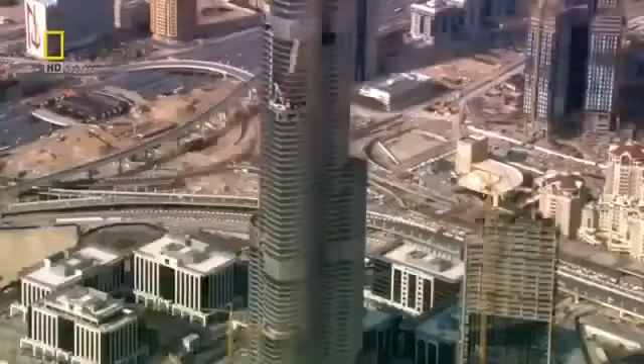We have the tallest building. We've got the greatest hotels. We are creating something very, very special. A centerpiece of this new Dubai will be a shopping mall designed to outstrip all malls, with 1,200 shops and a slogan as brash as its scale: everything you desire.

Completed to a next to impossible deadline. The biggest challenge that we had to face is time. People haven't done anything as this size this quickly before. Riding on its success, a multi-million-dollar price tag, and the reputation of Dubai.

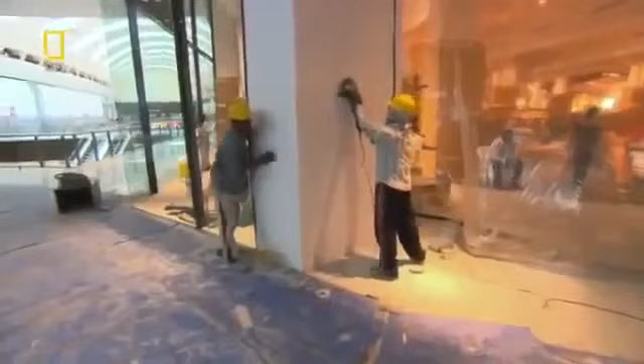The desert sun rises over the Dubai Mall, the city's shining new landmark. In 3 days, the mall will open. Everywhere you look, over 10,000 workers are frantically racing to beat the clock. Miles of railings left to polish, acres of marble still to clean. Mannequins are waiting for their flashy threads.

The mall, sold as the best Dubai has to offer, is now in a desperate race against the sheer scale of this project's ambition.

Bob Fields, the new head contractor, is on his rounds. He has a lot of ground to cover. The site contains the area of 50 football fields. Every corner he turns, there's something that needs finishing, cleaning, tidying, and he has to sort it out himself.

Lynette, where's Omar? Hurry up, I need him right now. Well, tell them to retract.

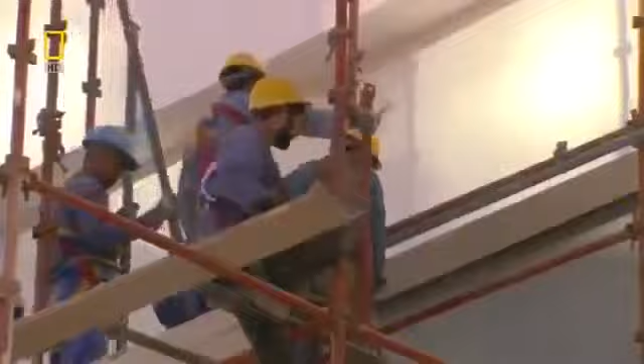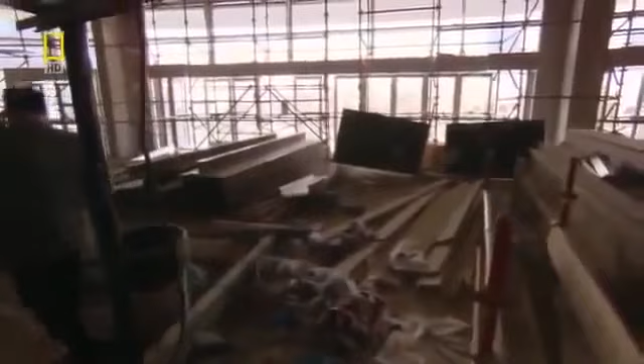He's determined that the mall will open on time. It's already missed 2 deadlines. If it misses a third, well, that's down to him. But of the 1,200 shops due to open here, only half are occupied. Some just haven't been fitted out yet, and some have yet to be leased.

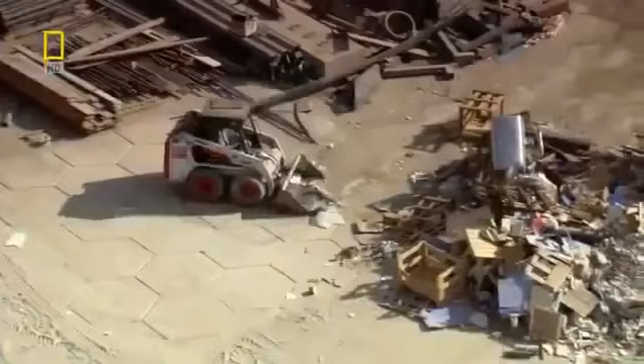What looks to us pretty much like a building site, to Bob is a diamond in the rough. Nobody goes home until 1 o'clock in the morning and everybody's back at 5. Overall, the entire community has come together to cooperate and give us the opportunity to open the mall. It's going to be very exciting.

We're going to have SWAT teams that are set up and positioned around the building. We're going to invite the public to come in. Traffic is going to be a challenge. We're anticipating some 50,000 cars every day.

The thousands who thronged the mall when it eventually opened will never know the real story of those frantic final hours. They would have come to see a mall worthy of Dubai, with opulent spaces and shops, row upon row of them.

There's a vast aquarium to wonder at, with a massive acrylic viewing panel bigger than any other in the world. There's a full-size ice rink in a city where outside temperatures can top 40 degrees.

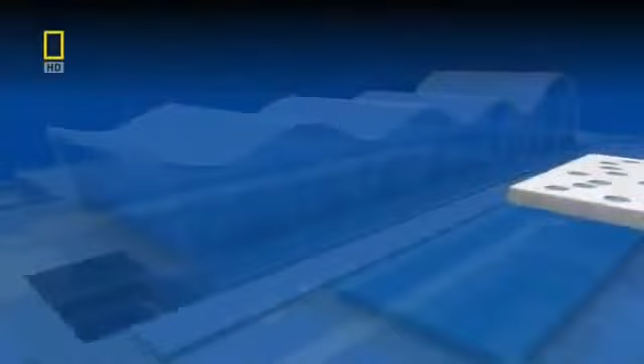The mall is so vast, it was assembled out of 37 conjoined buildings. It boasts an old-fashioned Arabian souk, a world record-beating aquarium, an ice rink, and an entertainment center complete with a roller coaster. Stretching over 1 square kilometer, it sits on a mega floor space that beats the reigning mega mall in China and dwarfs the Mall of America hands down.

Two years back, and a formerly empty stretch of sand is being turned into this retail palace. The project is badly behind schedule. Going by best laid plans, it should have opened by now.

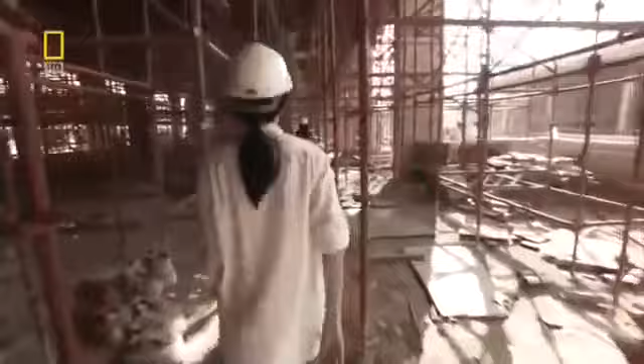Angeline Chan, chief architect, is on one of her regular visits to the huge spaces that she's helping to create. Future ceiling heights for the tenants. Let's go see the precast panels. It's bigger than anything she's yet done, probably the job of her career, with some touches she's particularly proud of.

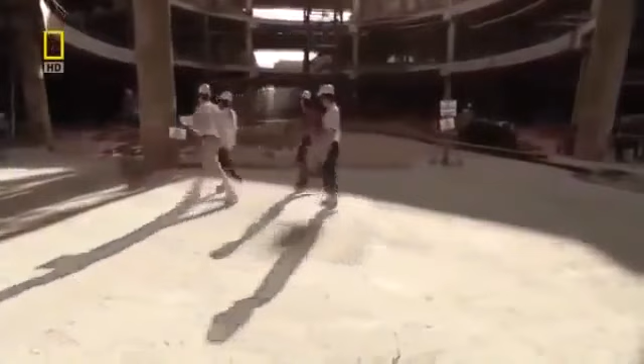I think my personal favorite spaces in the whole mall are all the atrium spaces, the 3-story high corridors. Even at this stage, when you walk around the mall, and finishes aren't even in yet, but you can feel the majestic spaces that surround you. I'm just left in complete awe.

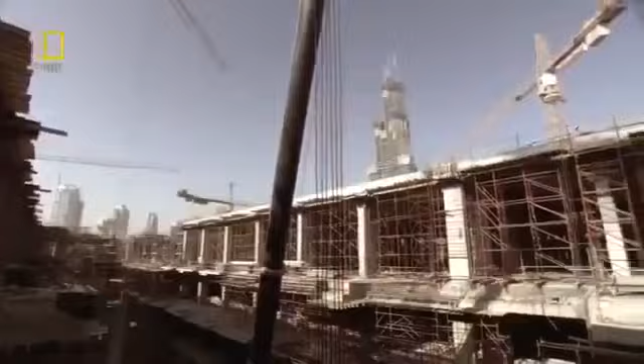There's no time for her to relax and enjoy the view, though. Every time she comes here, there are technical challenges to be faced. The knottiest problem: to get column-free roofs over the vast atrium in place on time.

So what's the contractor promising us now? You're probably looking at about February next year for this. The biggest challenge that we had to face is time. We're given the task of building this mall in 28 months.

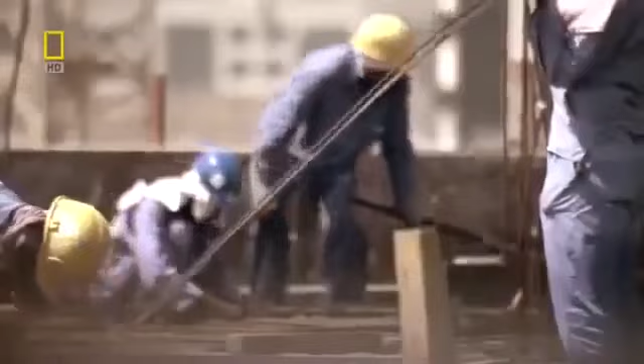Months behind the original schedule. It's not just the open halls that are causing problems. The whole design is throwing up challenges for the architect.

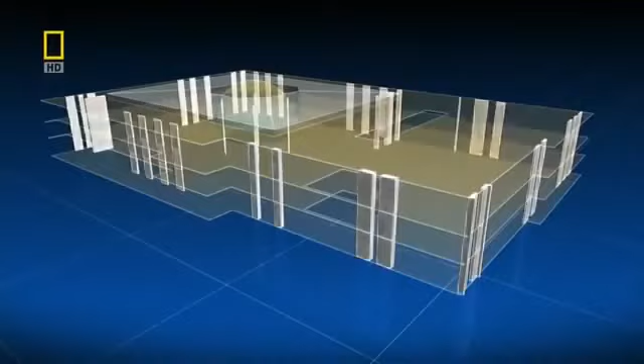The complex has been designed as 37 separate buildings. Local codes say all structures must hold up against earthquakes up to 5.5 on the Richter scale. So each building is reinforced by shear walls that withstand lateral force. A side-to-side motion won't bring it down. A 100-millimeter gap between each building not only allows for expansion in the desert heat, but if one should fall in an earthquake, it won't bring down any others with it.

While Dubai does not stand in a high-risk area for earthquakes, the disaster in Bam in nearby Iran was felt even here. In 2003, that devastating quake left 43,000 dead, 30,000 injured. Many perished as buildings collapsed. In Dubai, no one is taking any chances.

More than anyone outside the royal family, one man is responsible for the shape of modern Dubai. The Director General of the Department of Economic Development, Mohammed bin Ali Alabbar, known universally as the Chairman. Everyone on the Dubai Mall project answers to him.

So you can give me a discount. Our rates compared to them is very reasonable. We will work together, I appreciate it. I will do all your rates, I need to open your book. Open book, I'll do open book with you.

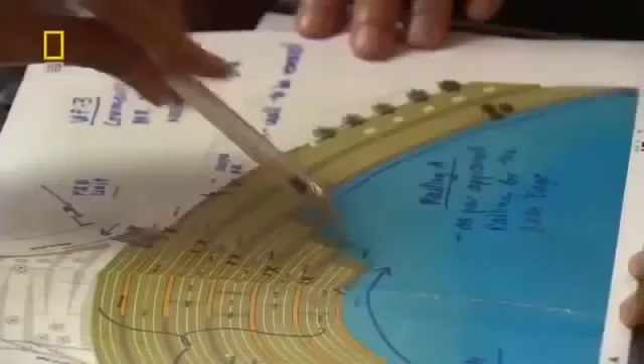Fair? Fair. Open. But the chairman is nothing if not a hands-on boss. It means he comes up with changes to the design.

Today, he's not too pleased with the fountains he's paying top dollar for. Last week we had to decide that we are taking some walls out, some water feature that, in my view and my management's view, was obstructing fountain views. We're putting beautiful restaurants overlooking this $100 million fountain. Can you please take the wall down and let them see the fountain?

Simple. The first reaction is, yeah, it's very, very painful. And there's always a deadline to chase. So it's never an easy task. I like to get involved sometimes in some of the design elements, which maybe I'm a little too involved, to be honest with you.

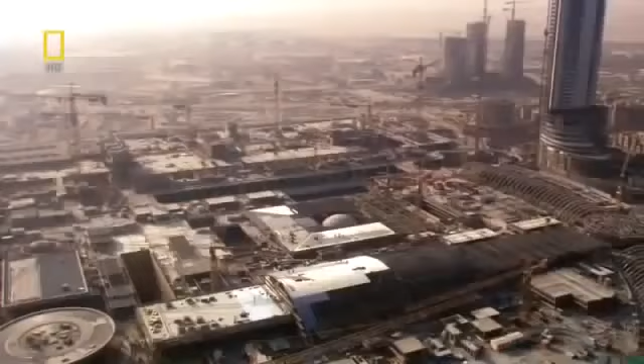Well, his involvement here is one that will reshape Dubai. Next to the mega mall, he's also set his architects challenges that include the world's tallest skyscraper. We are creating something very, very special in this area. We have the tallest building, we've got the greatest hotels. It's going to be something that people recognize us for.

So what the chairman wants, the chairman gets. Back at the site, Angeline has to break the news to the construction head, Jim Scobie.

We've been looking at this for about 6 weeks, 2 months. So it's been 6 weeks? What we'd like to do is, if we can go ahead and redesign this quickly and get it to them. Okay. So the next time we meet Sistra...

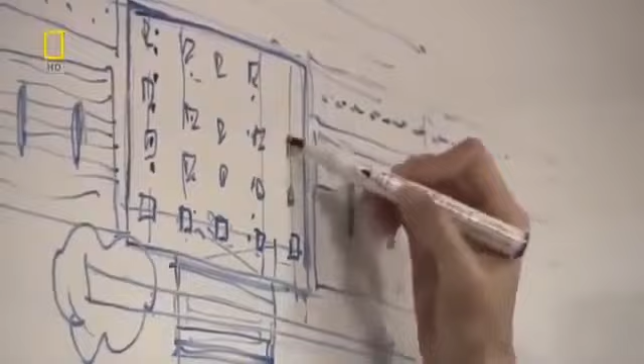For a minute there, it sounded like a plan. Oh, really? But there's a catch. Whatever we design, and we're probably coming up with 3 alternatives, has to be presented to the chairman and all that.

Angeline tries to make light of it. No, just do it in between the piers or something. She always finds a way to make the changes the chairman asks for. So it might be some sort of lightweight canopy structure. And you just hang around here, you sip coffee, you listen to the water, this nice sound, and then birds chirping. Today is a good day.

Everyone politely goes along on pretty much an impossible task. People haven't done anything this size this quickly before. And if this wasn't enough, there's a sandstorm approaching.

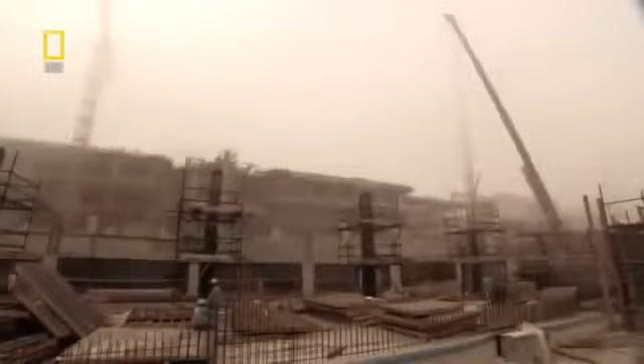The Dubai Mall, largest in the world. It holds 95 elevators, 150 escalators, with plans to attract 30 million visitors in the first year alone to its array of glitzy shops.

At its center is the aquarium with 400 sharks. In total, more than 33,000 marine creatures can be viewed through a panel so large it's in the Guinness Book of World Records. The chairman made sure of that.

The size, it's important, but it doesn't really shake me. But yes, I want to know how big it is, what's in there, how many species. So you see, we've got 33,000 species in this thing, we've got 400 sharks. Say, okay, now we're talking.

The task of constructing this monster mall has been an epic. It's still nowhere close to opening day.

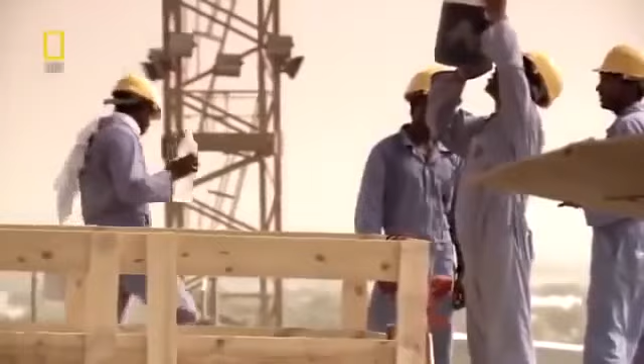Every day, the night shift of 2,500 workers heads for some well-deserved rest, and the day shift of 10,000 workers picks up its tools. It's tough work in the raging heat of the unforgiving sun. Temperatures in the desert emirate can hit over 40 degrees in summer. Heat exhaustion is an ever-present danger, especially for a foreign workforce acclimatizing to the local weather and the demanding schedule.

Currently, the work on site doesn't stop at all. It's 24/7, 24 hours a day, 7 days a week, during summer, during winter.

People say, the difficult we do quickly, the impossible takes us a little longer. And that's what we have to deal with here, until you say the chairman's coming, and then they say, oh, we'll get her done.

The chairman, Mohammed bin Ali Alabbar, is responsible for some of the shiniest new buildings in Dubai. And today, he's coming to the mall for a viewing. He likes to be hands-on.

Will them please, again, I need someone to trim these palm trees around the square. Still, dead leaves are hanging. Yeah? Okay.

On another trip, he noticed the colored panels on the facade of the gold souk were not to his liking. I think it was maybe a little too dark, so I said these shades are not matching from the main road. I said it will reflect badly on us. I think they had to take the panel down and probably replace it.

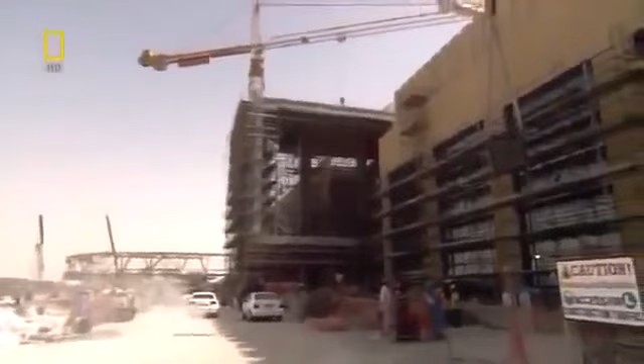Once it's completed, the mall will open onto a boulevard on the scale of Paris's Champs-Elysees.

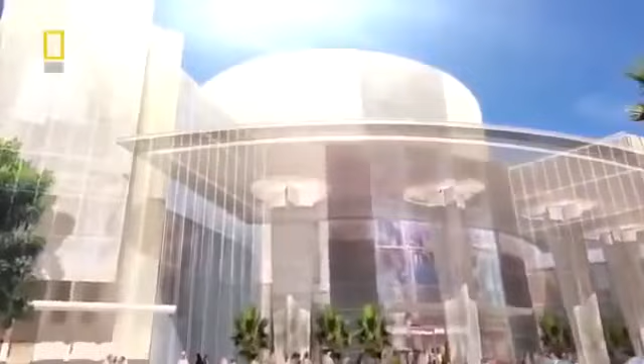Now the chairman wants to see how the grand entrance to the mall is progressing. He wants to be sure it'll make the right impression. Obviously, his arrival is treated as a bit of an event, and he's ushered to the high atrium just inside the main entrance. It's going to be a highlight.

I believe that's about the maintenance issues and all the rest, but when we check their ceramic, they're going to be very, very nice. He listens knowledgeably to the explanations of the decisions being made. The boss tries his best to be enthusiastic.

Then he zeroes in on the details. All your columns are finished one color, huh? One cladding. Okay. Thankfully, he doesn't notice anything he absolutely has to change. I think a little bigger would have been also okay.

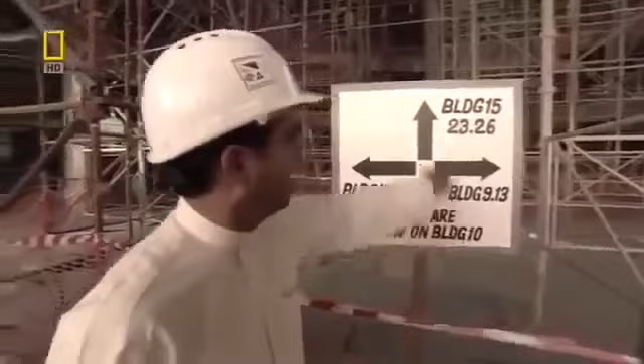Building 11, 12, we are at building 10, building 15, 23, 26, and this is just amazing, as one building.

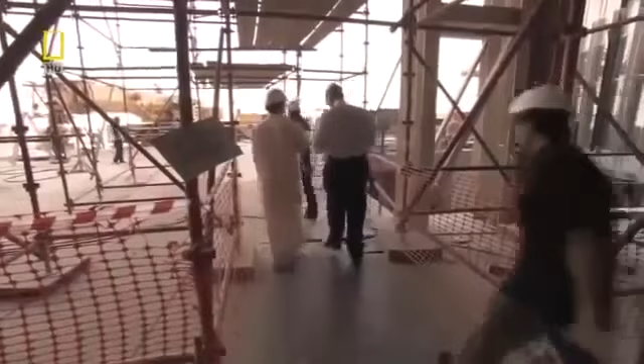Well, I just want to go and shake every small guy's hand. We'll put it together brick by brick. We'll put in the granite floors. I feel like I want to do the opening so quick, and the opening should be for them. Thank you, guys.

In another part of the mall, the little guys are frantically rushing for opening day.

One of the most important attractions at the mall will be the aquarium. Once done, it's designed to impress. That means it's going to have to be big. It will hold 10 million liters of water, equivalent to 4 Olympic-sized pools, and acrylic panels 750 millimeters thick will hold back the enormous pressure of the water. By heating and cooling the panels, the joints will disappear, creating a single panel so big, it'll make the Guinness Book of World Records.

The centerpiece of the aquarium will be a transparent tunnel 48 meters long. Sitting at the tank floor, 10 meters down, it will be subject to immense pressures. Iron rings help to keep its shape. It has used up the entire supply of acrylic from 2 factories for a year. It's had to be precision manufactured in 4 massive pieces, and each giant piece weighs 32 tons and is extremely fragile. So moving them requires care.

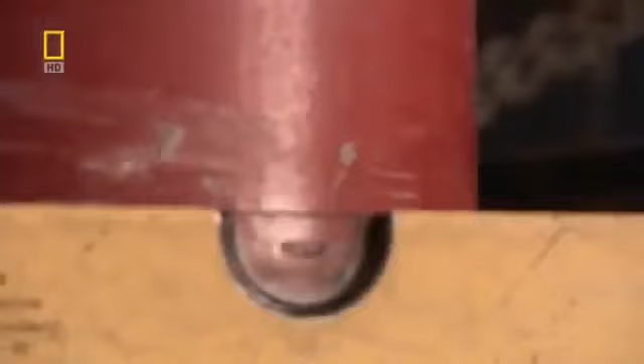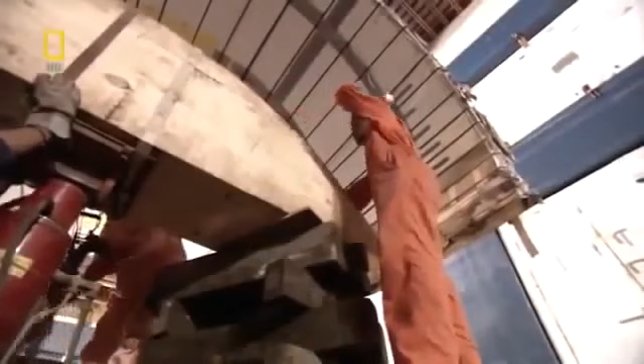It's all done under the watchful eye of manager Peter Knapp. It's the first time anyone here has attempted anything like this. Everything is done in slow motion. Even with something as large as this, there's little margin for error. The skilled workers build up the supports to level the jack before it inches up to take the weight of the tunnel.

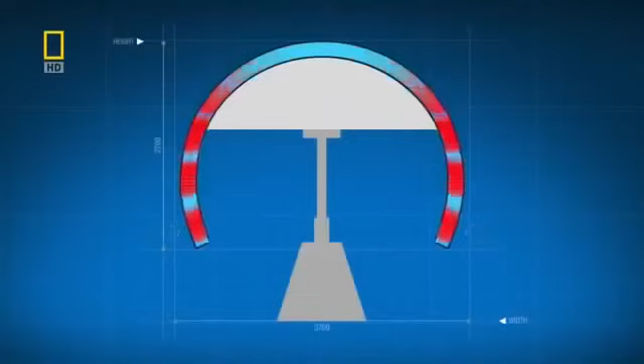The tunnel lifts into the air all right, but soon the crew spots something: the tunnel is distorting under its own weight. The pressure has forced the sides to curve inward. If they set it down now, it will shatter. My worst nightmare is if it were to fall and it breaks.

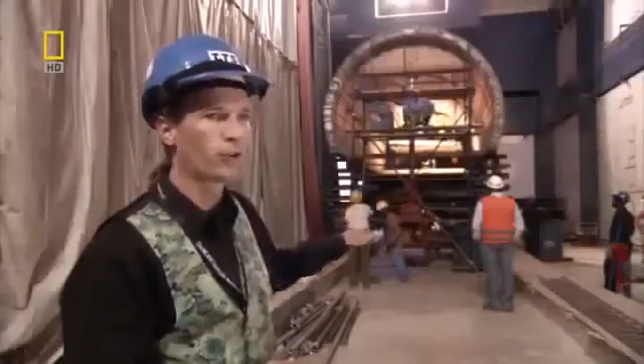They're built in the States, with a fabrication time of a number of months, and it takes a number of weeks to get here. Because we have to bring the tunnel back in, there are things outside that cannot be done until the tunnel section is here. So the entire project, or part of it, is going to be delayed for half a year to a year.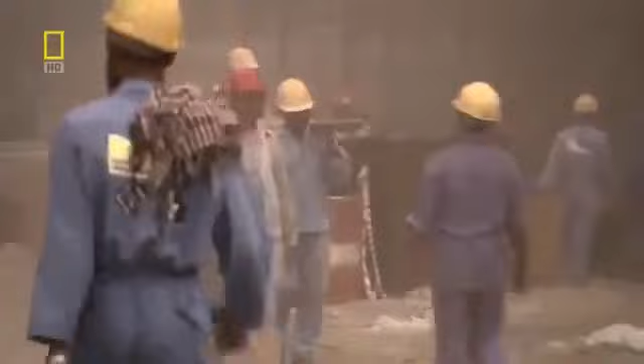Dubai's not shy about flaunting its extravagant projects, such as the world's biggest man-made island, the Palm Development, home to many of the world's rich and famous, and some of the highest property prices. Oil money has been pumped into the famous Burj Hotel. Now the mega mall is rushing to join a Dubai being rebuilt for a day when the oil money runs out. And as always, no innovative job is without risk of delay, even if it's from a simple sandstorm, which cuts down work to the bare minimum.

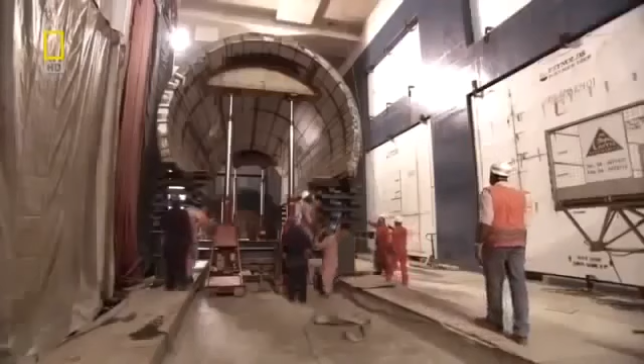The next day, after a night of head scratching, they've come up with a new idea to move the aquarium tunnel into place. In theory, the plan should work. The measurements add up. So they spread the load, and the tunnel is now balanced across 2 separate jacks.

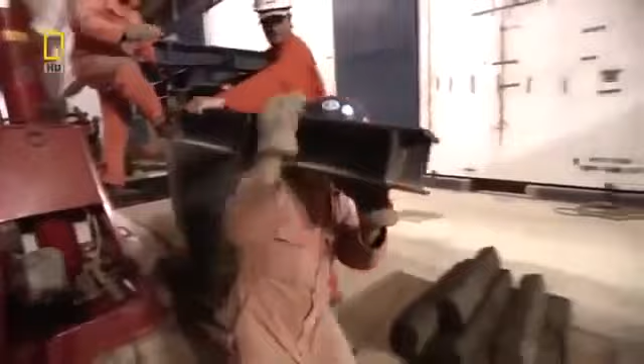The supports come down piece by piece, and slowly the tunnel inches downwards. But just when they think the plan is working, the crew notice that the jacks are out of sync, and their load is coming down at an angle.

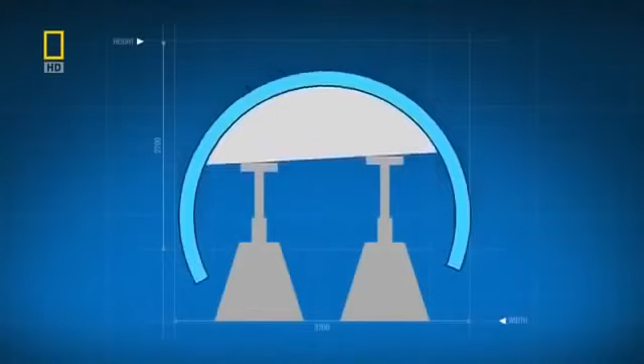The pressure of 32 tons of acrylic is concentrated onto one corner. If they try to set it down, the edge will snap off. It's not an easy job. There is stress because if something goes wrong, there's, you know, the consequences on it, so that does put quite a bit of stress on you.

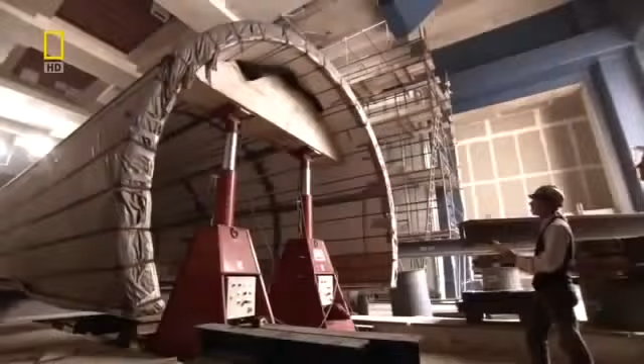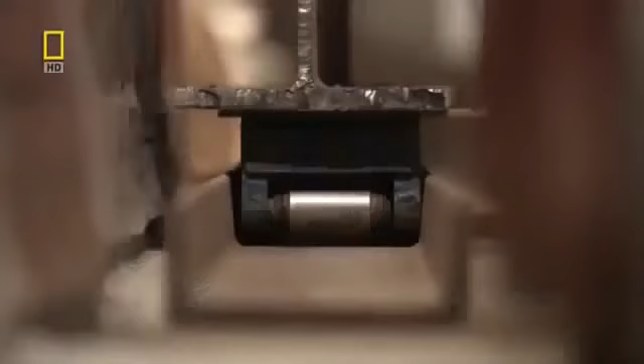All that remains is to haul it into place with a rather simple lever and pulley system. Only another 3 pieces to go. When they're all in place, they will be welded together, made watertight, and covered with 10 million liters of water.

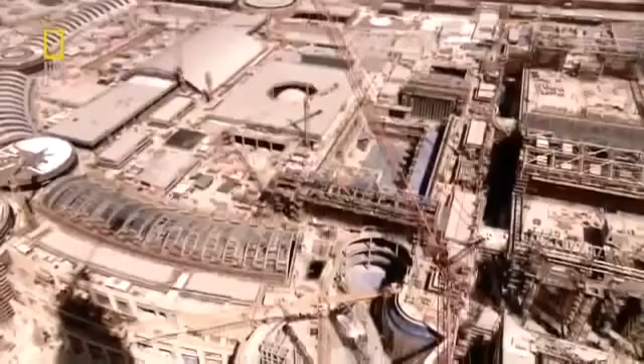While the aquarium is taking shape, architect Angeline is focusing on another of the chairman's ideas, an Olympic-sized ice rink. Layers of concrete are going down and being smoothed off. Even at this level, below the surface, bumps will mean uneven ice.

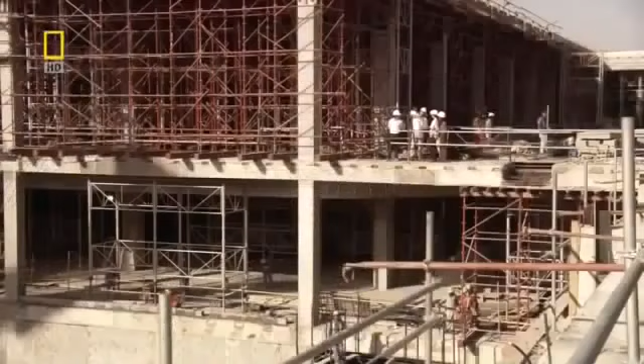Angeline has come back to talk the roof through. The rink can accommodate 400 skaters at a time. So the roof is going to be massive, and they plan to use natural light, creating a Swiss cheese structure with the desert sun beating down through 60 skylights onto the ice below.

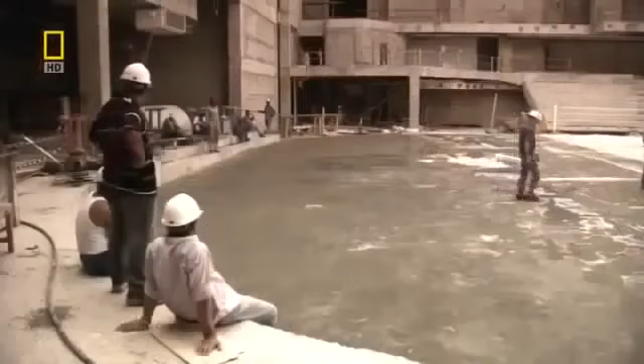About the impact of the sun, the studies will be coming back in a couple of weeks' time. I think the worst case scenario is that we may have to introduce film to just take maybe 5–10% of the direct sunlight off. The sheer heat could be a problem for the ice.

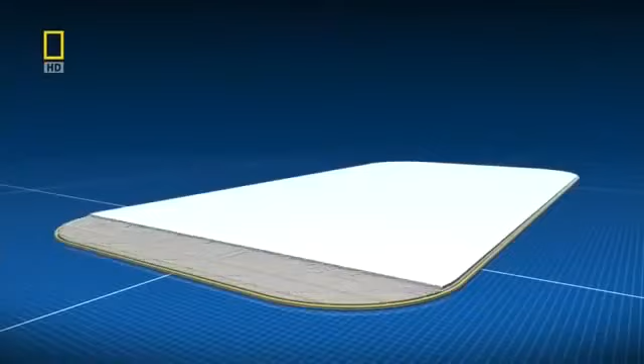An ice rink is rather like an ordinary fridge. Pipes are laid through the concrete. Cold glycol will be pumped through them from refrigeration units. This will freeze the concrete, and then the ice will be built up on top of it, layer by layer. But having skylights above means the ice must be kept 2 degrees colder than a rink in a temperate climate.

Everything on this site is geared to breaking records. You need cranes to shift all this big stuff around. In fact, there's been so much construction in Dubai that it's said up to a quarter of all the world's stock of cranes can be found here.

The biggest at the site is the Demag 2800. There are just 50 of these 600-ton monsters in the world, and they're only called in for jobs that no other crane can take on.

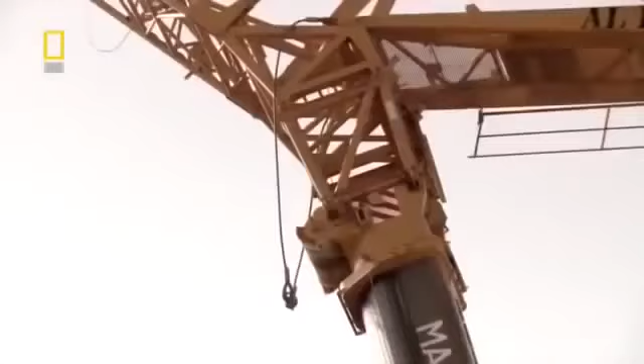Somebody's in a hurry, they want the job done quickly, but the machine cannot move like this. We need patience first with this heavy crane.

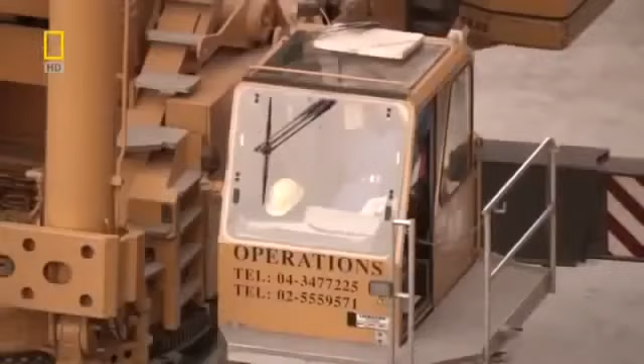George and his Demag have been called in today to start lifting the pieces for the roof of the entertainment complex. Each load has to be lifted one by one, a job which requires all the patience and experience George has gained in his 26 years with his crane.

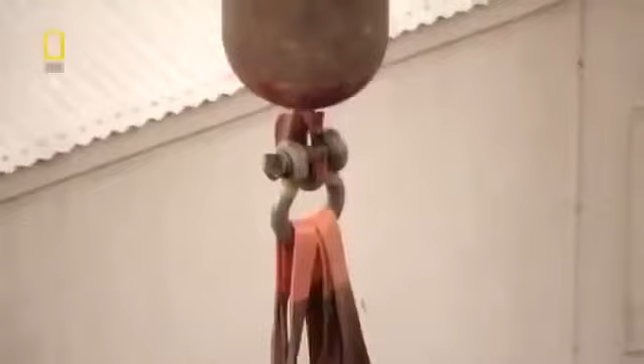Some people are angry, some people shouting. That time we want to keep silent like that.

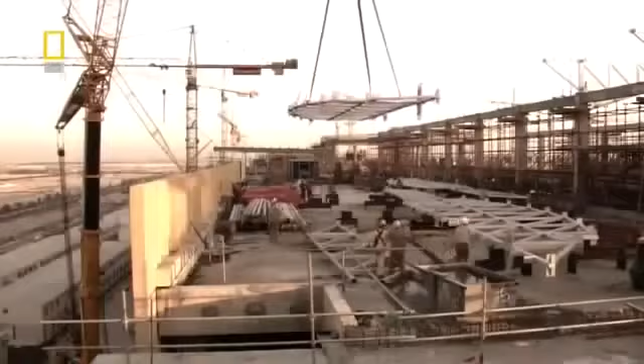The roof of the entertainment center will be put together like a giant jigsaw puzzle. Supporting a huge span with no columns below is difficult enough, but this roof has thousands of pipes, beams, nuts and bolts. Because in Dubai, they not only like things big, they like them complicated.

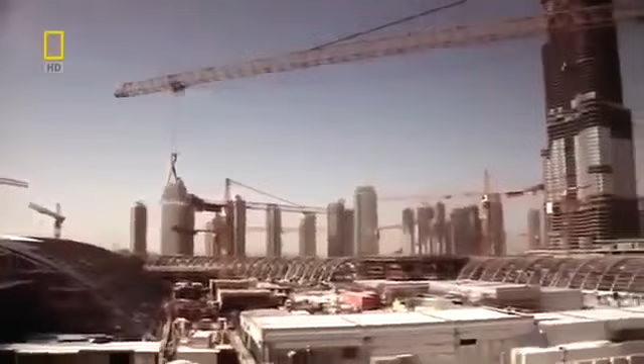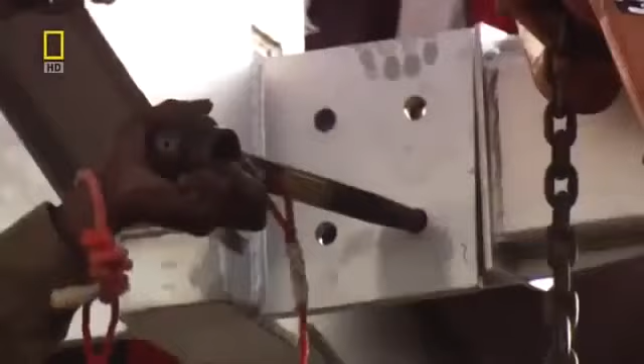The easier way would be to build a simple flat roof, but this will have an undulating design, which means the trusses and joints have to be rock solid, but they're amazingly complex. Each piece has to be designed and manufactured individually. Of course, the design was a special request from the chairman.

I think you should have a little bit of taste, so now I want to do something better, we want to do something creative.

And the entertainment roof is just one of 69 roofs that will come down over the mall. It was one of the most complex roof structures that we've ever done. With the many skylights that we've designed, each different from the other, we were setting ourselves this huge task.

One factory in Dubai has upped the number of machines, ramped up its manpower, and has been working round the clock for the last 4 months to get the roof parts made.

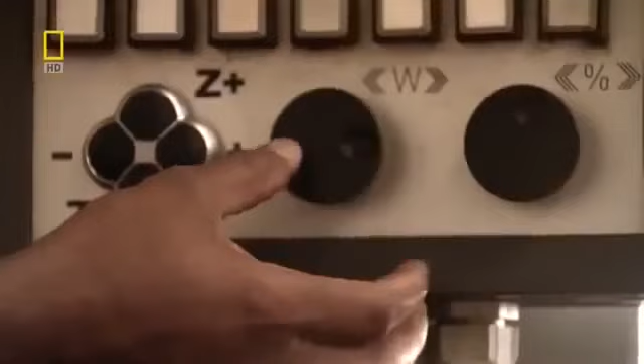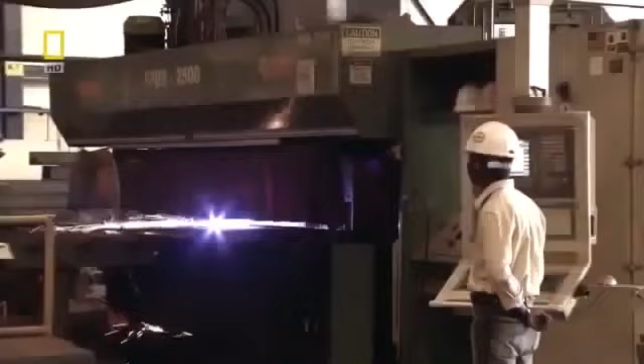Once the intricate computer designs arrive, the work begins. It requires a surprisingly fine touch. The hand of the operator guides the computer designs. Every hole, every cut, every weld has to be millimeter exact. Any mistake, and the pieces won't connect on site, and the roof can't go up.

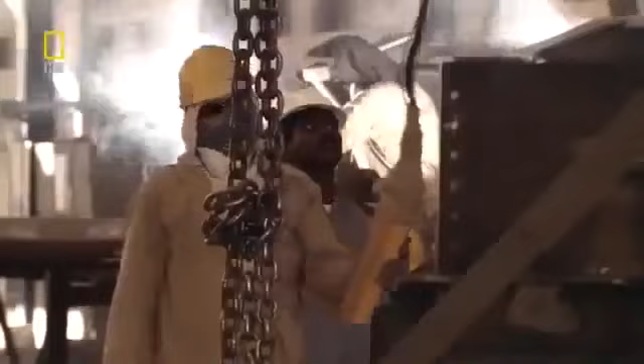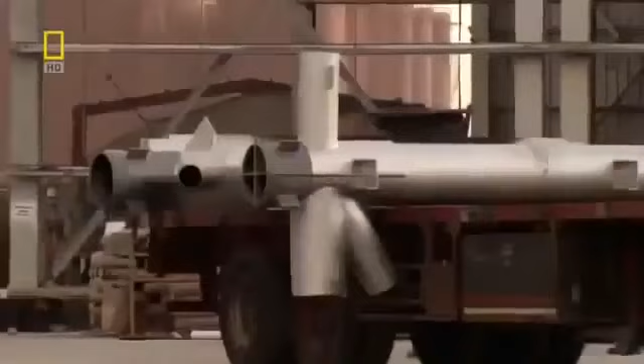By now, the factory should have delivered all 14 support pairs, but the schedule was over-optimistic, and only 5 have actually been delivered. Extra jigs have been fitted to speed up the work, though no one knows how soon all the trusses will be ready.

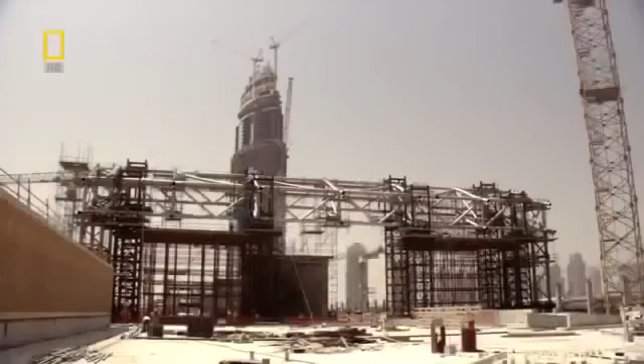Back on site, the trusses are delivered, and despite all the efforts of the engineers, they are proving hard to fit. The structural engineer that designed it is saying it has to be dead on, we can't move anything. And the construction engineer is shrugging his shoulders at me saying, I can't build it. Many months after Dubai promised the world its largest mall, the roof has yet to come down.

For centuries, Dubai has been a trading post. The Arabs have long been seafarers, and Dubai was a prime stopping-off port on the route from India. Wander the streets, and you find many traditional shops and markets, the souks of Arabia. One of the most famous of these is the Gold Souk, where locals and foreigners alike go to buy gold. Browse the stalls here, and you might even find a bargain.

The plan is to include an echo of the Gold Souk in the brand new 1 kilometer squared Dubai Mall. The souk is intended to be a jewel in the mall's crown, and no expenses have been spared to give it a touch of Dubai, right down to the temptations on display.

We have a piece - an iPod made of pure gold, 18 karat, with 5 karat diamonds. We're talking approximately this one, like $35,000.

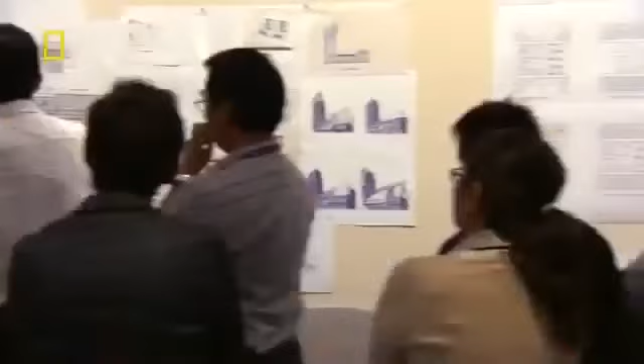The job they had was to make the mall function at a human level. Not easy, and this job was left in the hands of one of her team members, T, an expert in getting people around large buildings without getting lost.

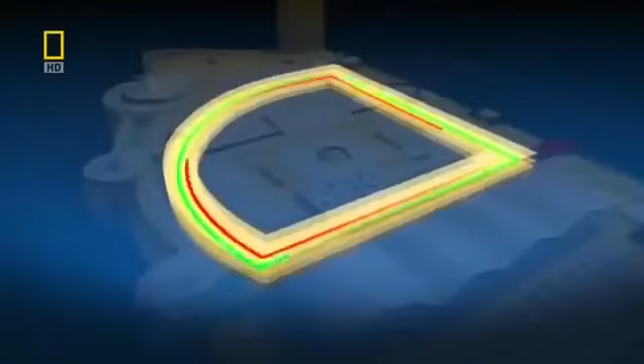Dubai Mall is basically like a huge quadrant, so that's the circulation area that you move around. The loop keeps shoppers moving through the mall. With no side alleys and narrow passageways, people won't get lost and can spend their time spending money. And all shops get prime locations, meaning rents can be high.

For the less intrepid shopper, the architects also designed a shortcut through the loop. This leads past the aquarium, a landmark to help shoppers keep their bearings.

The architects also resorted to a tried and tested trick. Big spaces like anchor tenants, we try and put them at the extremities of the shopping mall, so that whatever shops are in between will benefit from the traffic traveling between these two malls.

Simple signposting is enough to guide the shoppers from one atrium to another, and there's always something to look at. At off-peak times, these huge spaces could seem very empty, so every atrium is filled with things to look at to keep the mall feeling busy.

To tempt people to stick around, the prime way of doing this is strategic positioning of food and beverages, places to eat and drink for you and me. You try and put them where you can have nice views or where you can actually spill out into the open areas.

Outside the mall, when the desert heat is less intense at night or during winter, the chairman's multi-million-dollar fountains have been designed to keep the diners lingering and tempt them to come back.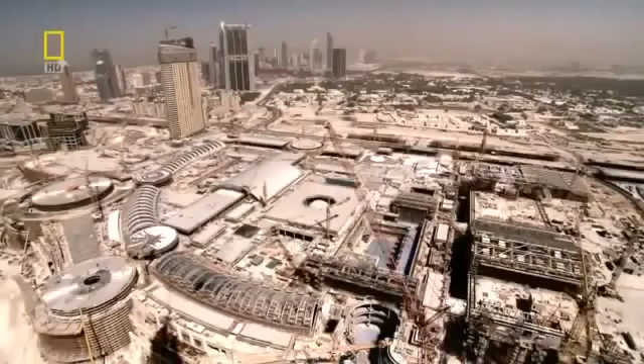During construction, the team of architects set its shoulder to the wheel, but even they couldn't keep the project from missing its deadline.

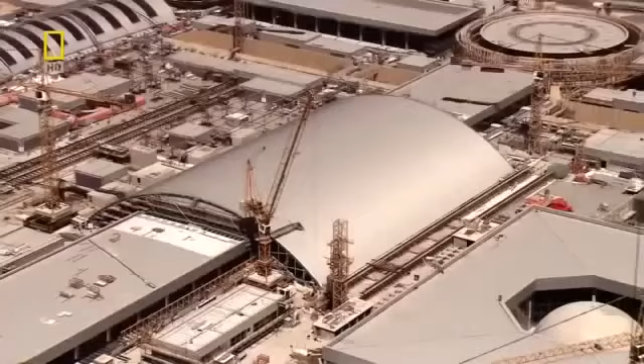Months past the mall's original date for opening, and the roofs are still only going onto the individual buildings, each one different and bringing its own headaches with it.

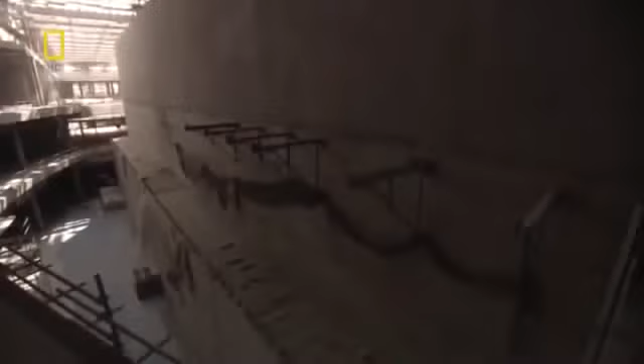The aquarium's viewing panels have been boarded up and sealed. Inside, chemical bonding with regulated heating and then cooling of the acrylic causes the joints to fade away. And the aquarium tunnel, too, is finally in place.

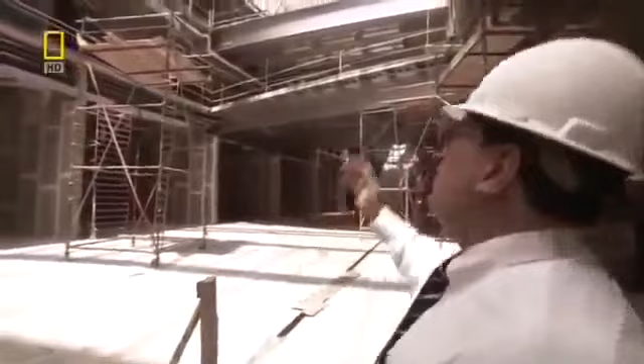In the meantime, the lead contractor has changed. Bob Fields is now in charge, bright-eyed and bushy-tailed. Hey Hank, can you send somebody over to tenant space GF110 and have the graffiti removed from the wall? The structural steel's just been completed, so we're going to be cladding it and putting glass in it shortly.

But Bob is just getting to know how the chairman is running the project. We did have a chairman's meeting just a few days ago. We're still very much committed to June 30th. They also communicated to us clearly that we cannot miss the date. So I want to make sure that we get it done, and I'm not going to get it done. All these guys are going to get it done, but I just want to make sure that they're all challenging themselves accordingly.

But soon enough, he misses this deadline too. He's encountering problems. The trusses for the roof of the entertainment area have still been arriving late and imperfect.

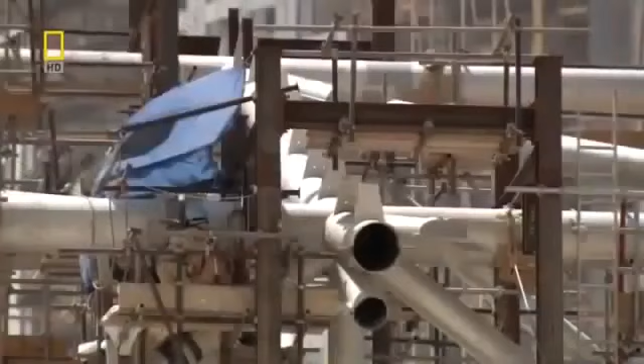Now these things are actually assembled in the shop, fully built, and then taken apart and brought out here. But between taking them apart and shipping them and everything else, we end up with some very minor deficiencies. We're talking, yesterday we were talking 3 millimeters, 5 millimeters, 8 millimeters, between the way that the pieces are lining up. And the structural engineer that designed it is saying it has to be dead on, we can't move anything.

And the construction engineer is shrugging his shoulders at me saying, I can't build it. So I think we found a compromise, and I think it's going to work.

Bob's found his chief task is damage control. If a guy has an issue, he needs to come, because that's where the rubber hits the road.

And that can mean banging heads together. Guys are all grown-up professionals, you know exactly what we're talking about here. All this little conversation is for the third time.

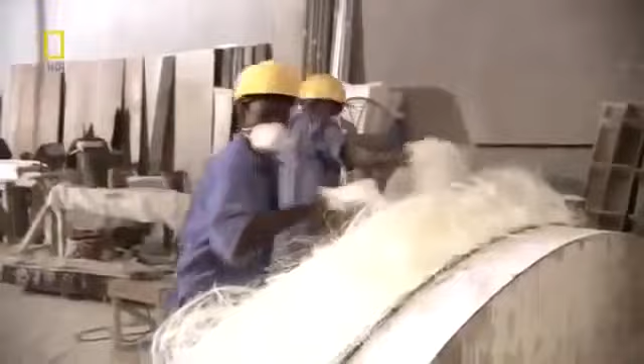Through threats and persuasion, the mall slowly gets completed. Bob's team has come up with ingenious ways to meet the deadline. They have set up a workshop within the site to make the fiberglass facade that'll cover the mall, so supplies are always at hand.

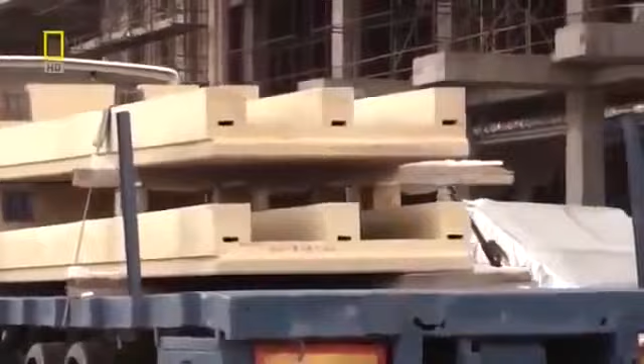But even as the finishing comes up, new complications set in. Everybody has to be very careful while moving it. We don't need any damage to this, because once you damage it, we're gonna have to rip it down.

You hear what he's just saying? A lot of times a guy will come into a meeting and represent that everything's a problem. All the floors can't go in, all the ceilings can't go in. By the time you settle him down and nail him down, you find out there's 2 or 3 issues.

The goal that I set for finishing in June is absolutely obtainable, and we will obtain it. The difference between an optimist and a pessimist, or somebody that's negative, is whether they understand what the work is.

So after months and months of war rooms, the facade goes up, the roofs come down, and the mall slowly gets ready. There are 170 escalators in the building, for the 30 million expected to descend on its stores in the first year alone. Acres of marble and glass begin to dress the bare concrete.

The souk is given its expensive finishing touches. Finally, the mall can look forward to some kind of opening. It's been an epic struggle, but with one last effort, the biggest mall in the world should be able to fling open its doors in just 3 days.

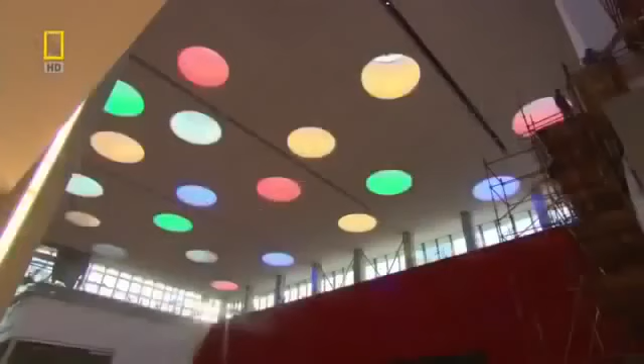At the ice rink, the Swiss cheese skylights have come in. But the final layer of ice is still being slowly, painstakingly frozen.

Thankfully, the aquarium is ready, and it's feeding time for the 32 sand tiger sharks. Lunch is usually slices of mackerel and milkfish, with expensive tuna on the menu as an occasional special treat. The sharks only consume about 15 kilograms of food daily, a tenth of all the food the kitchen prepares every day. Unless they get regular meals, the sharks could wreak havoc in their enclosed environment.

We have the largest stock of sharks anywhere in the world. In the sea, they would take every opportunity to feed that would pass them by. With a routine like feeding at the same time each day, having a food type that's specific to them, and also our behaviours, we can condition the sharks to realise that food will come every single day.

Every shark, every ray has been implanted with microchips, and they're all monitored here for their growth from the time they arrive at the tank, their health, and their fertility. They need to be monitored if they are pregnant.

But one thing Paul need not worry about is the sharks snacking between meals. They would much prefer to wait for the divers to deliver food than to invest energy in hunting. So eventually, within a month, it starts to settle down, and the sharks really pay no attention to the fish swimming past them.

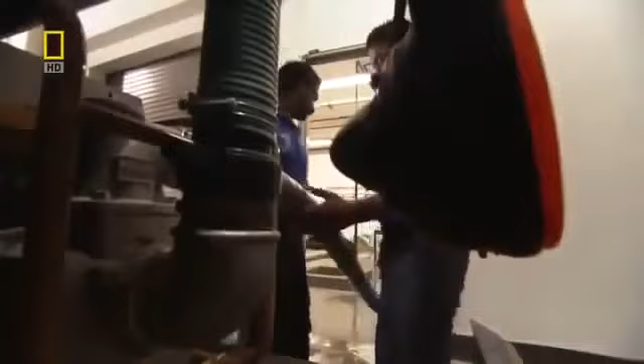40,000 liters of seawater make their way to the mall, a journey the trucks will be making every day for years to come. Each month, slightly more than 10% of the total water in the giant aquarium is replaced. These truckloads simply top up the natural daily losses from filtration and evaporation. Though it doesn't go straight in with the fish, Gulf water is salty. It has to be diluted, then cleaned and filtered.

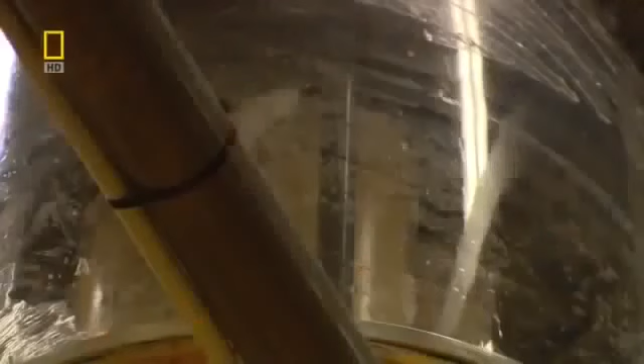Okay, so the area we're in now is the life support system for the main tank of the aquarium. This is the heart of the aquarium where all the water is processed, cleaned, and conditioned before reintroduction back with the animals.

The system monitors the oxygen content of the water, its acidity, the air and water pumps, the filters—everything is automated. And there are fail-safes built in. Nothing is left to chance when it comes to the fish's welfare.

So if, let's say, a pump was to fail down in the basement, and that pump was responsible for sending new seawater to the aquarium to top it up when we lose seawater through our foam fractionators, it will send me an SMS alert in case I'm outside my office, and it'll also send an alert to this office.

With everything running smoothly, the aquarium looks set to be the highlight of the mall opening. When you go and look at it, it really touches my heart. And then straight away I think, oh my God, I want to see the kids running around this thing.

Against the odds, the ice rink has come together. The ice has formed, so much so they can even get the Zamboni out, smoothing off the surface, ready for the first skaters.

And so it's finally the night before the opening. 12 hours and still a million things to do. One more night passes in Dubai, the city on the Gulf that never sleeps.

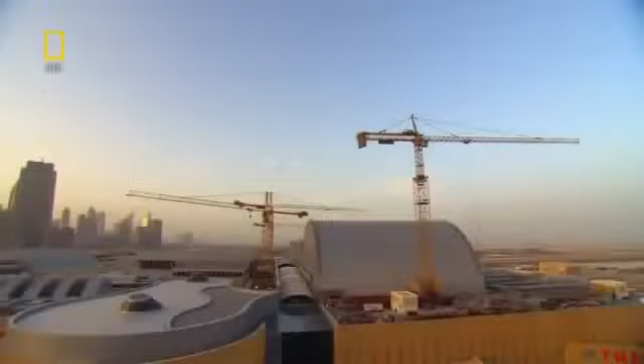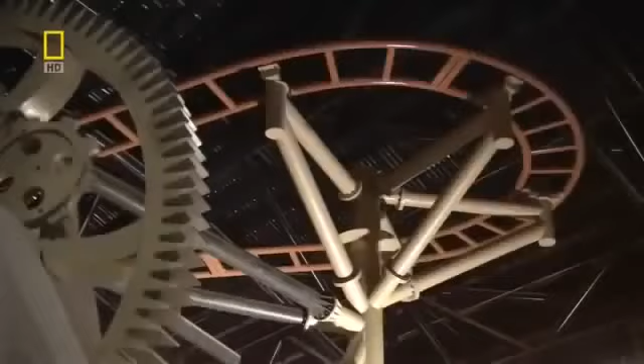The undulating roof has finally been fitted onto the entertainment center, with all its joints and trusses. Though whether it's strictly accurate to say the delay is just one year is also open to question—the actual entertainments inside are far from finished. Mock streets look down onto yet another construction site, though the track for the roller coaster is at least in place. It's going to take some while yet to fill this space and open it to the public.

Frankly, with the many changes, it's a wonder it's got even this far. The mall is open, it's functioning, and people are visiting. Opening any mall this size is a gamble, but one done in true Dubai style, it may yet pay off.